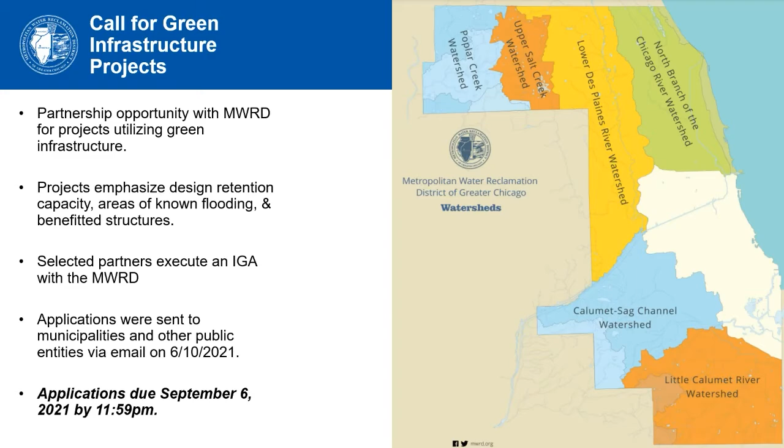Applications were sent to municipalities and other public entities via email on June 10, 2021. Applications are due on or before September 6, 2021 at 11:59 p.m. The scrolling banner on MWRD's homepage, mwrd.org, includes a link to the GI Partnership Program webpage. The GI Program webpage, shown here, has complete and detailed information on the program as well as a link to apply. Directly, the URL is mwrd.org/green-infrastructure-0. Once you get to our program webpage, use the Click Here to Apply button.

Shown here is the web-based application. You have the option of a downloadable PDF form or a web-based application form. The web-based application is preferred, but we will also accept the PDF form filled out and submitted via email, only in the fillable PDF format. Note that the web-based application does not allow you to save your work partway through filling it out, but if you download the PDF form, you can use that to draft your answers.

The application is very similar to past years, with just a few exceptions, one of which is that if your project involves non-GI costs, such as street lighting, regular asphalt paving, etc., we ask that you provide a breakdown of the GI only and non-GI costs for the whole project. If you have any questions on the application, how to interpret a question, or anything else, please contact giapps@mwrd.org.

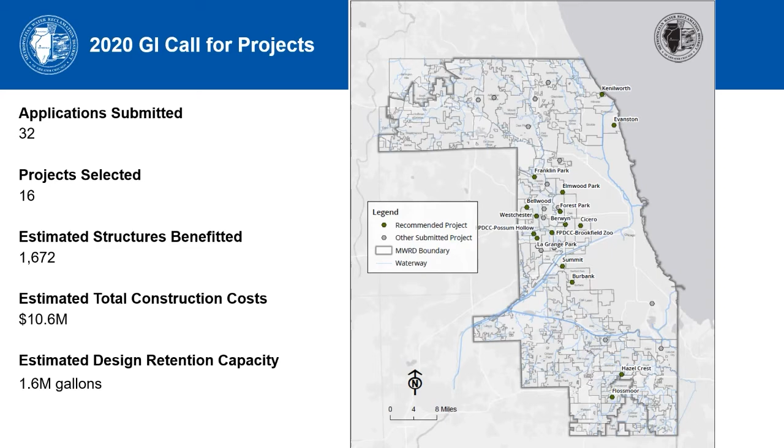More information can be found at mwrd.org/services/green-infrastructure, including online and downloadable versions of MWRD's GI Partnership Opportunity Application form at mwrd.org/GI-APP. Eligibility requirements and submittal instructions are included in the application form and on the website.

4. Applicant must be willing and capable of contract administration and maintenance long-term. 5. District will consider whether potential partner agency is in compliance with the Watershed Management Ordinance and the Inflow and Infiltration Control Program. 6. Project funding cannot be used to satisfy any federal, state, local, or other stormwater permitting requirements, including the WMO requirements for detention or volume control.

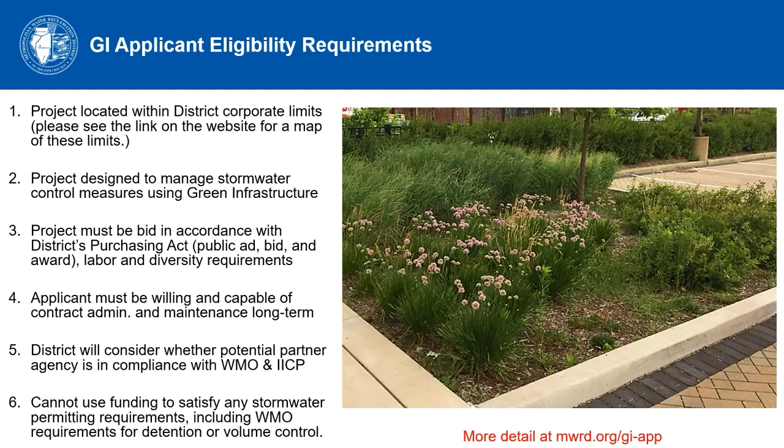There are a few exemptions from our Watershed Management Ordinance that you can see here. Development that incorporates in-kind replacement with green infrastructure may be considered non-qualified development. This means that GI development is not subject to detention requirements of the WMO. It is still considered development, but not part of the detention area. It is not applicable for volume control to meet the WMO's requirements. Please refer to wmo.mwrd.org for more information for the applicable requirements of the WMO.

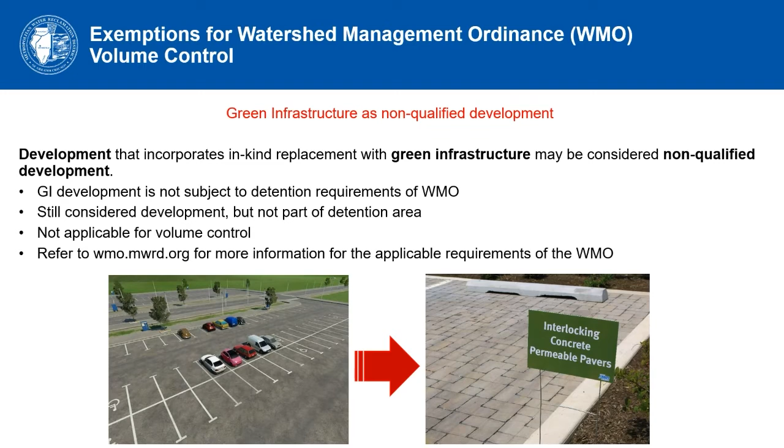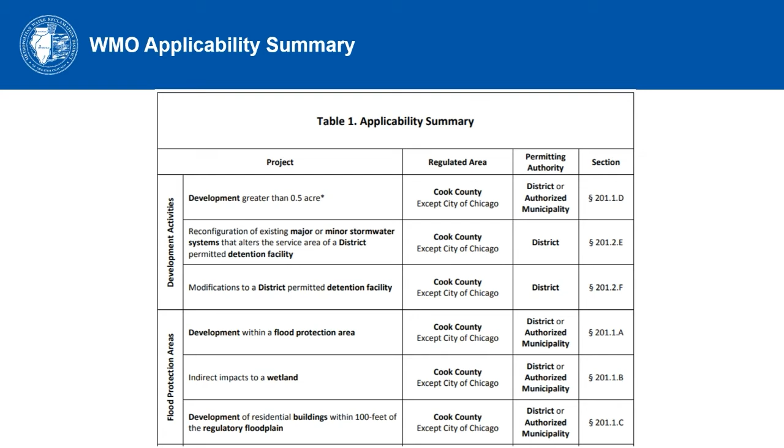The next two slides explain the guidelines for if a MWRD permit is required through the Watershed Management Ordinance. Most of our projects do not. Please check our website for more details. Note that there is now a question on the application that asks you to confirm if a WMO permit or any other state or local stormwater regulations may apply to your project. I will give you some time to read through these. Here's the second page.

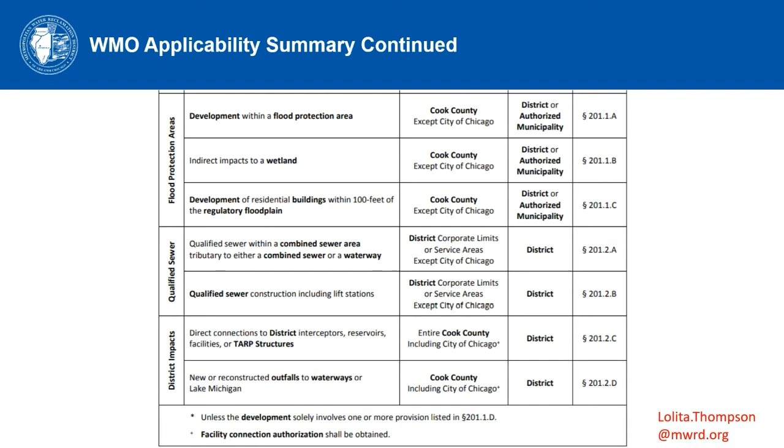Any partnership will require an intergovernmental agreement, or IGA. The applicant must be a public entity with the improved property to be within our boundaries. There are diversity requirements for most of the projects. We also have a public education requirement and a long-term operations and maintenance, or O&M plan requirement for all of our projects. Note that the diversity requirements are based on our contributions only, not the entire project budget. For more information on typical IGA requirements, see mwrd.org/GI-APP.

So how do we select the projects? Here are our primary selection criteria. Dollars per gallon used in determining the MWRD funding. These are the dollars that you're requesting from us used in this dollars per gallon, not total project dollars. The dollars per structure benefited by the project. The project time frame. Can this project be constructed within a calendar year of selection?

Other factors include flooding frequency and severity, combined sewer areas, or separate sewer area, with a slight advantage going to combined sewer areas. The total cost of the project, median income of the area, maintenance resources, expertise, and experience, visibility and educational opportunities. Is a recipient a past recipient of recent MWRD funding for similar projects?

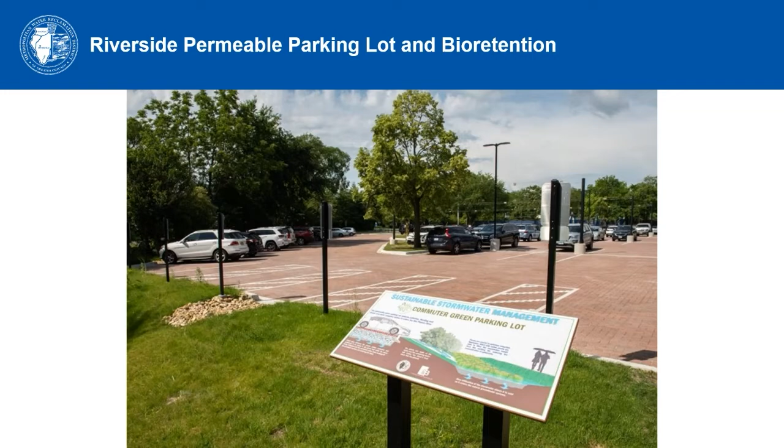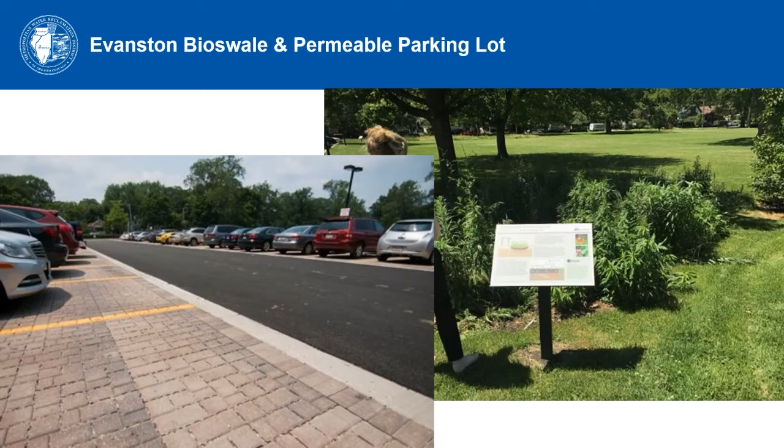The next project was a bioswale and permeable parking lot installation at the Evanston Civic Center. The old parking lot would flood and contribute rainwater that went inside the building during heavy rains. Instead, the new rain gardens, bioswales, and 3 types of permeable pavement catch the rainfall and slowly infiltrate it into the surrounding soil.

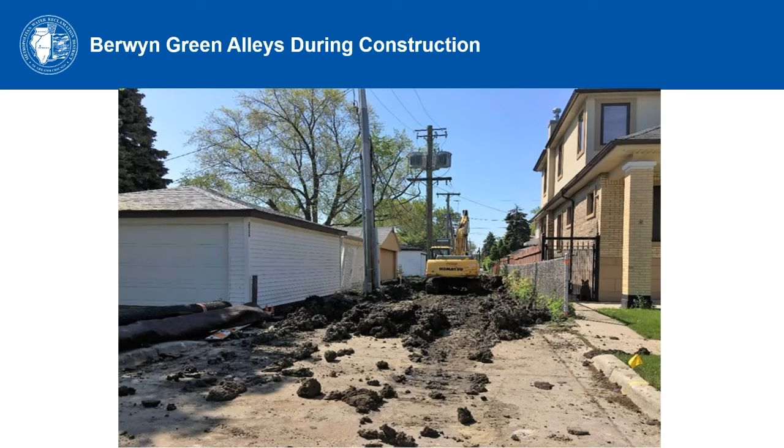Another recent project was the installation of green alleys in the city of Berwyn. Here's the project during construction and after construction. Please notice that the alleys are sloped to drain water to the center, where a permeable paver strip lets stormwater drain into the ground. We now use a larger permeable strip to resist clogging. This project delivered almost 680,000 gallons of DRC.

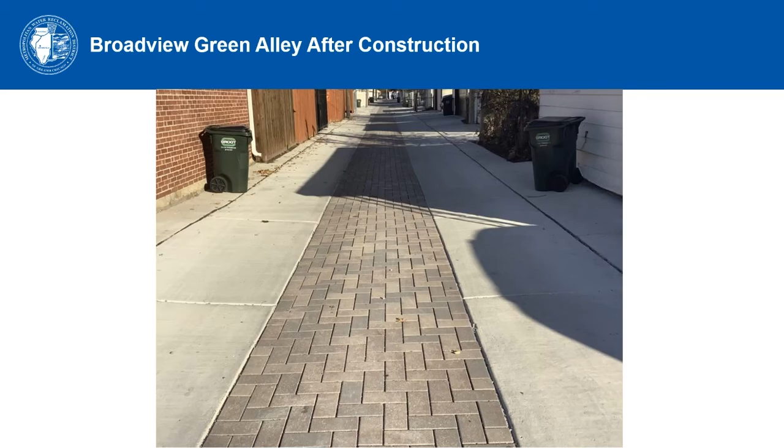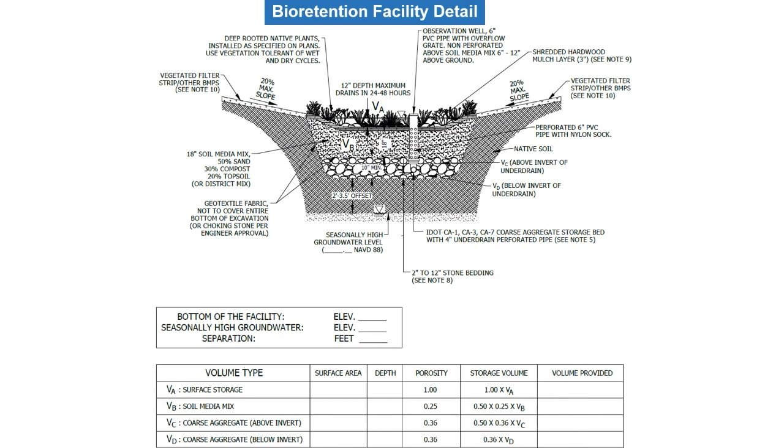Note also the geotextile fabric to separate open voids in the gravel from the surrounding soil. Geotextile fabric goes along the edge and the top and the edge of this open graded aggregate here. If there is room available, another option is to spread the rain garden out over a larger area and exclude the gravel layer and geotextile fabric, allowing the roots to penetrate into the underlying soil.

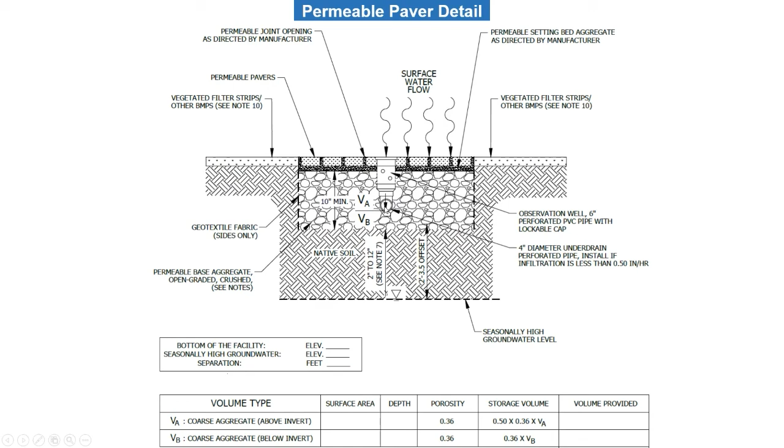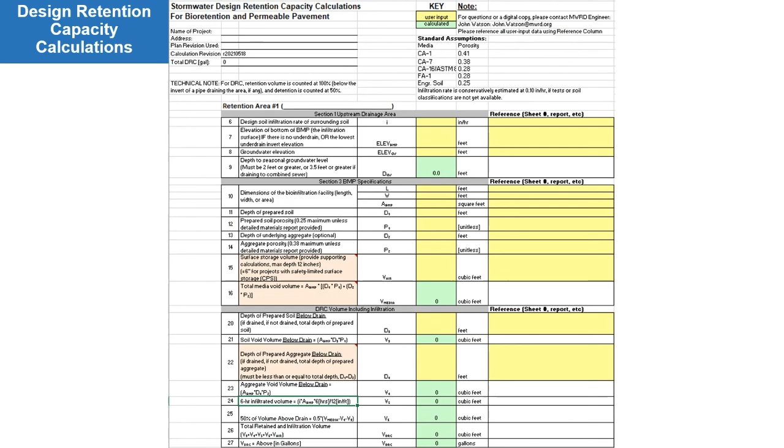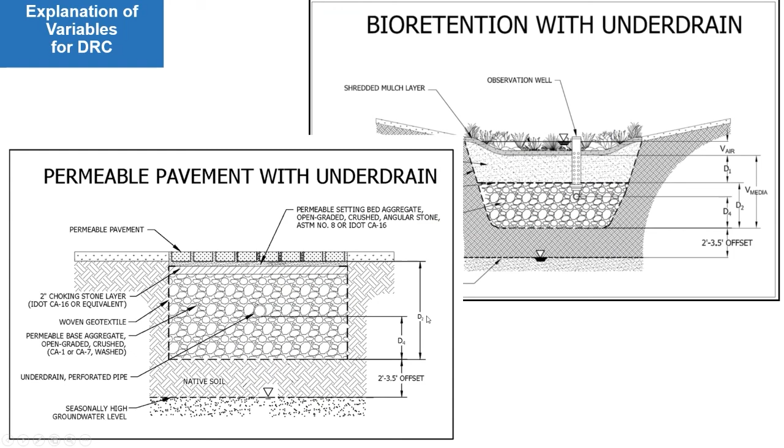Design retention capacity is a measure of the volume of stormwater that is permanently retained on site and therefore does not lead to local sewer systems or waterways. To calculate this consistently, we have created a DRC spreadsheet available for download on our website that will walk you through this process. The input cells are shaded in yellow and the output in green. Please remember to include the references for where you are getting the information from. Each variable is described verbally in the calculator, and also graphically using drawings in the same Excel calculator file. You have the variables here and the depths that they represent.

Whether you have applied in the past or it is your first time, we encourage you to apply to our Green Infrastructure Partnership Opportunity Program. Applications are due on or before Monday, September 6th. So now is the time to think about where it floods in your community, put together your partnerships, draft plans, volumes, and cost estimates.